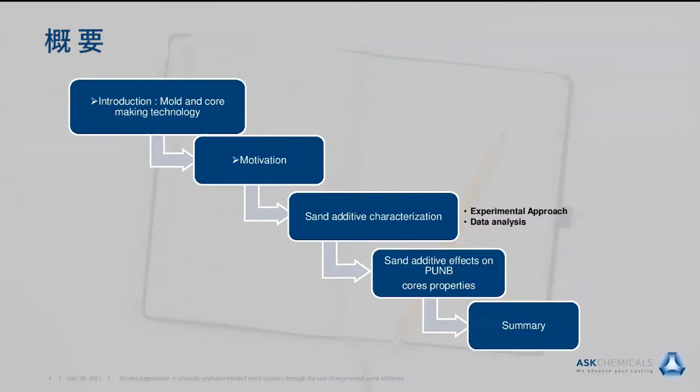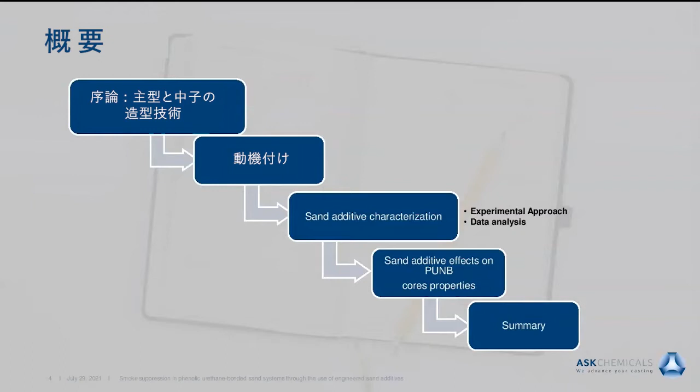So today we're going to start with the outline of the talk. I divided this talk in 5 sessions. First, we'll do an introduction about the mold and core making technology and overall the casting process. After that, I'll discuss the motivation, why we did this project, and then followed by how we did the characterization of the sand additive, the experimental approach, and some data that I will be sharing with you. We will also review the effects this sand additive could have on the phenolic urethane core properties, and we'll finish with the summary.

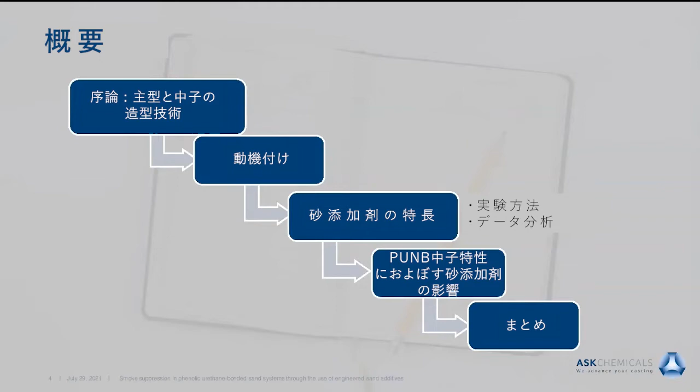So let's start talking about mold and core making. We all know that in order to have good quality castings, we need to make good molds and cores. It's very critical. For that reason, we had to find ways to create these molds and cores that can serve that purpose. And for that, most foundries use silica sand as a media. We're not going to go into all the possibilities, but let's say we want to bind these sand grains together. We have different ways to do it, and I'm going to go over this summary here.

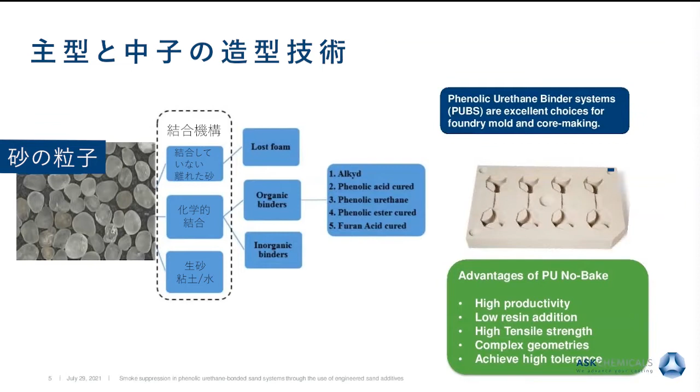So the main categories out there and the mechanisms to bind sand together are the green sand and the chemical bonded sand. We have other systems like lost foam and unbonded loose sand, but the most common are chemical bonded and green sand. Now inside the chemical bonded sand technology, we have another subcategory, which is the organic binder systems and the inorganic. For the purpose of this talk, we're going to mainly focus on the organic binders. And the organic binders also have different subfamilies, as I'm showing here.

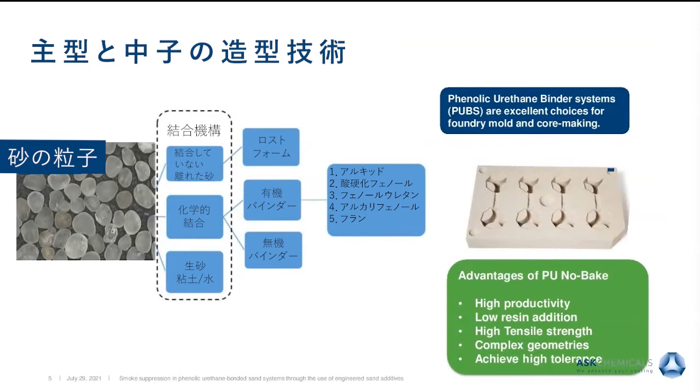What you can see is that most of them actually are differentiated by the way you cure your resin system, right? But for the purpose of today, we are going to focus on the phenolic urethane no-bake technology. In general, phenolic urethane binder systems are an excellent choice for foundry mold and core making, as you're probably familiar with them. I'm going to mention some of the advantages of the phenolic urethane. We have the high productivity you can accomplish. The resin can be used in low level addition, and at the same time, you can accomplish very high tensile strength.

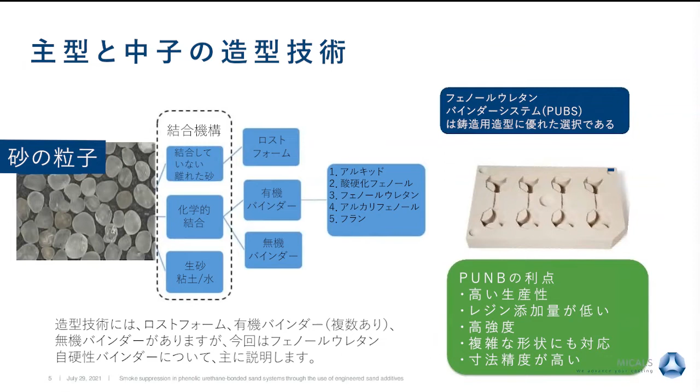They're also very good for making complex geometries. So when we have those complex shapes that need to be designed, this binder system serves this purpose really well. Also for surface finish of the mold, I think they're wonderful for that kind of property. And we can achieve high tolerance using these binder systems. Now, when we take those molds and cores made with phenolic urethane to the casting process, when we're ready to pour the molten metal,

the phenolic urethane will be exposed to very high temperatures due to contact with the molten metal. And when they are exposed to very high temperatures, they undergo thermal decomposition, so they get pyrolyzed, and as a result of that, there's undesired smoke and emissions. There's been a lot of work, especially at ASK, on the formulations of PEP SET systems, which is how we refer to our phenolic urethane no-bake systems, on improving this situation with the smoke and emissions. Reformulating has been a big thing, and I think we have gotten significant progress in some of our binder systems to eliminate some of the smoke and undesired emissions.

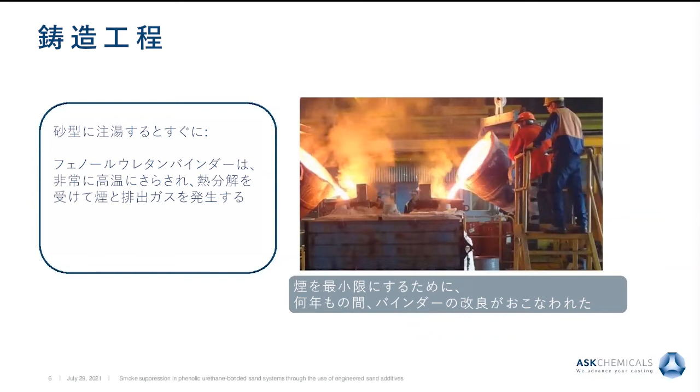But still, we have some more work to do, and we keep improving. We want to go toward cleaner technologies every day. That's kind of ASK's mission. And that will take us to the motivation of this talk today. The idea is to use an engineered sand additive. Sand additives are used in most foundries for controlling casting defects.

So this time, the idea is to have this sand additive serving a dual purpose. So in addition to the high quality casting and eliminating casting defects, we will be able to reduce the smoke. And for the rest of the talk, you probably hear me saying the word DESA. This means dual engineered sand additive.

I will refer to this proprietary blend that we'll discuss here as maybe VLSMK later on. So that's just the way we refer to it sometimes internally and sometimes in the lab. This engineered blend is now patent pending. So let's walk through for the rest of the talk how we developed this sand additive.

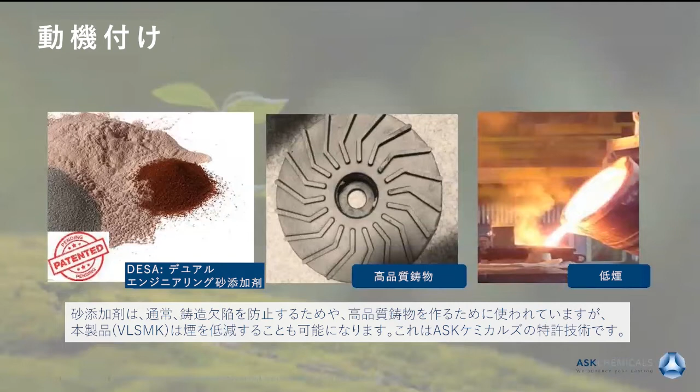So first we had to do some bench work. So in our R&D, we just developed small cores, and it's a simple concept, just like making a mold or a core in an actual foundry. We take the silica sand, we mix it with the sand additive. I always actually suggest this to people: you have to be sure the sand additive is completely mixed with the silica sand before you add your

phenolic urethane binder system. The phenolic urethane no-bake binder system has three parts. There is a phenolic resin, then the polyisocyanate, and then we have the amine catalyst. In this case, it's a liquid amine catalyst, which will be used to control the speed of the reaction. The result of that is a urethane bond. That's when you cross-link the polymer. So you form a very nice mold or core.

Just to show below some examples of the small specimens we use in the lab, so people are familiar with the dog bones. We can make dog bones at different conditions. Always, of course, we use a control specimen, which is the one with no additive, and then we can change the level of the additive to 2, 4, 6%. And later on, I will show why we use a certain particular range for this sand additive.

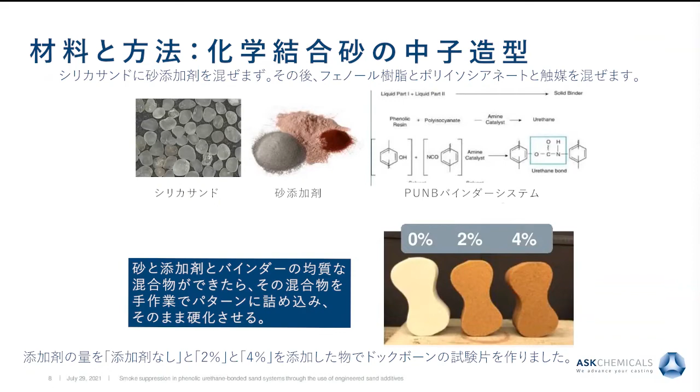So here's the first example, the first observation working with this engineered blend. So if we want to look at how much smoke we are producing, the first experiment you will do in the lab will be to pyrolyze the cores. So we use a muffle furnace. We place the cores at around 700, 750 Celsius for about a minute. Then you take that core and you can place it on a ceramic bench, a platform.

And as you can see on these two photos, these are actually photos from a video that we made. On the left side, you see the no additive. We try to help the eye by putting a black background and a ruler. And you can see that the no additive shows a significant amount of smoke. And on the right side, we have our dual engineered sand additive at 4%. And it's not completely 100% smoke suppression, but definitely there is a significant amount of suppression of the smoke in the presence of this sand additive.

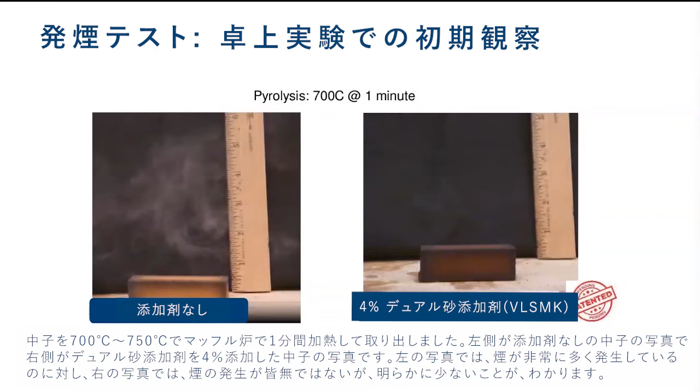Now, of course, we needed to do something a little more fancy than just looking at the black background and a ruler. So we wanted to quantify the smoke. And the way we do it, we use the same approach. We take the pyrolyzed cores, but now we transfer them to a chamber. So I show here in the middle of the pictures the actual experimental setup. This experimental setup is a vertical stack. You have a light source and a photodetector facing each other.

And when the smoke, due to the core present, starts traveling upwards, you will see that the incident light will be scattered by the particles and anything that will be blocking the incident light. For that reason, like a physics concept, you will have scattered light, which is what will indicate the amount of smoke present in the experiment.

So when you record this, you will measure the intensity of the scattered light as a function of time. So this blue curve here is just a cartoon to understand the data. The blue curve means you have a core specimen that had higher smoke, and then the orange curve means less smoke. That's the kind of data that we'll generate from these experiments.

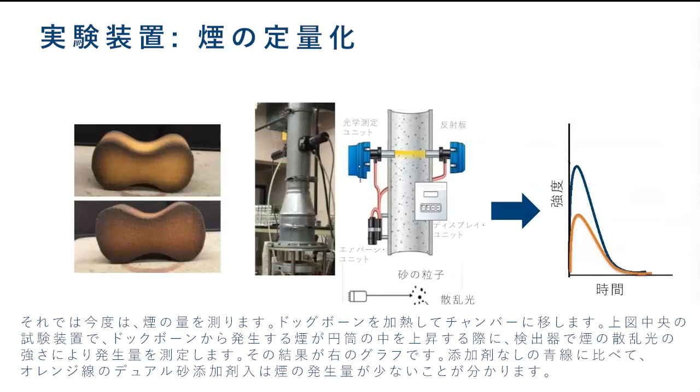So let's look at some real data. We measured 4 samples here. I'm actually showing the picture of each of the pyrolyzed dog bone specimens at different conditions. We have a control sample, which is the no additive. We always have that there for comparison. We have 2 levels for the dual engineered sand additive, VLSMK, 2% and 4%. And we also added a commercial sand additive just to have another comparison point.

So as you can see clearly here, as I explained earlier, if you have a plot of intensity as a function of time, if you take the area under the curve of this, that will be your total smoke. So if you see here, the green and red curves definitely show some reduction. So if we want to quantify this a little bit easier, you can sum these individual points and get the area under the curve, the total amount, and divide by the intensity as a function of time sum in the presence of no additives.

When you do the normalization, you can see at 0% you had 100% total smoke. As you increase the amount of sand additive, you will see there is a decrease in that total smoke. So to determine the smoke suppression, you do 100% minus this number. That will give you your smoke suppression.

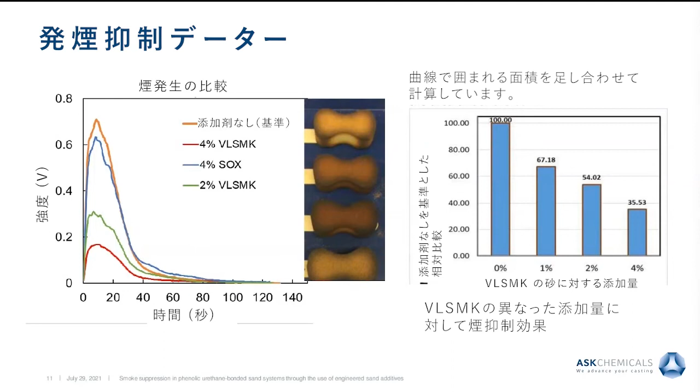Now we were very excited here. I mean, this is exactly what we wanted to accomplish. We wanted to have an additive that was going to help to control some of these smoke and emissions. And this bench work was for us very exciting. So we wanted to do the real thing, right? So far I showed you that we've done everything with little core specimens, pyrolyzed them, and looked at the smoke.

So at ASK, in our R&D team, we have the advantage that we had a pilot foundry lab. So we had a 300-pound induction furnace where we can pour steel, iron, aluminum. So we decided to make some bigger cores on step cones and then pour some steel and look at what we were going to find for the smoke reduction. So you can see there the step cones made; the darker ones are made with the additive. The light color is the one with no additive.

And we placed them inside graphite molds. The idea with the graphite mold is that we only see the contribution coming from the core in case we want to determine the smoke and emissions. So we want everything from the core, not the mold. At the moment we were going to make these videos for recording this event, we removed those pouring cups. They get removed immediately since they're made also of PEP SET. So we removed them. Let me show you now a video that we made.

And by the way, just to make clear here, these cores were made with round silica sand, 1.2% PEP SET Magna 1215, 2215, and a ratio of 60-40 part 1 to part 2. And the catalyst was 4% 3401.

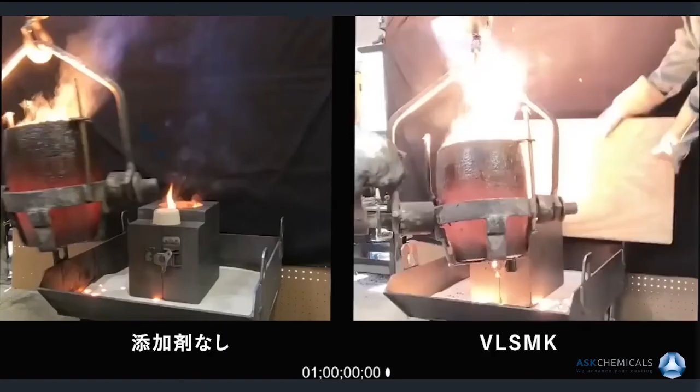Let's see if I can play this video. I think, see if this works.

So you can see here, I'm not playing the whole video because they're very long, because we're trying to set this up. On the left side, you see the no additive. And on the right side, you see the VLSMK engineered sand additive. So I can play it again. In case it went too fast, you can see on the left side there's a significant amount of smoke when you don't have the additive. And once you put the additive in the core, you definitely suppress significantly the amount of smoke.

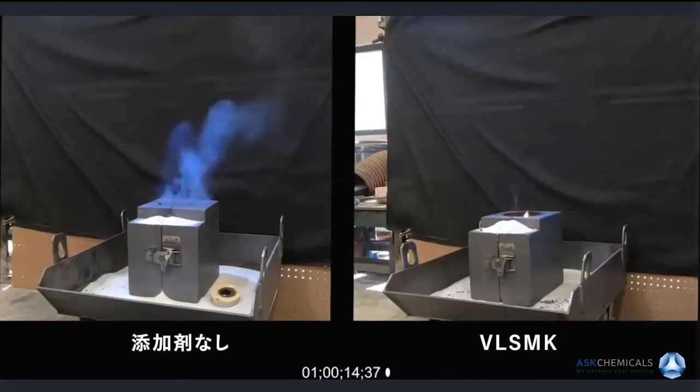So let's go back to the presentation. Right. All right.

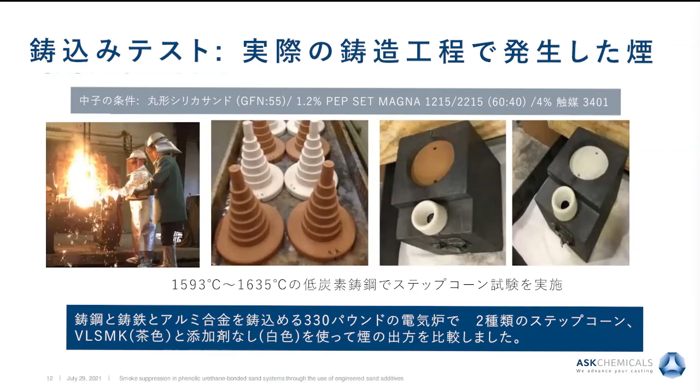Okay, so what you can see, and you just saw in the video, is that clearly there's no question: with the additive, we can definitely suppress quite a bit of smoke there. When we analyzed each of these videos, it took about 8 minutes for the core with no additive to stop smoking, and it took about 3 to 4 minutes for the core to stop smoking in the presence of the additive. So that already gives you an idea that what we saw in the lab was in good correlation with what we actually see in the foundry.

Now, so far, we had seen the smoke suppression. It works very nicely. Now, the next question that comes to mind is, what are we suppressing? Are we suppressing any of these undesired emissions that we know are there during the casting process, like volatiles or any pollutants? Well, we needed to look at that.

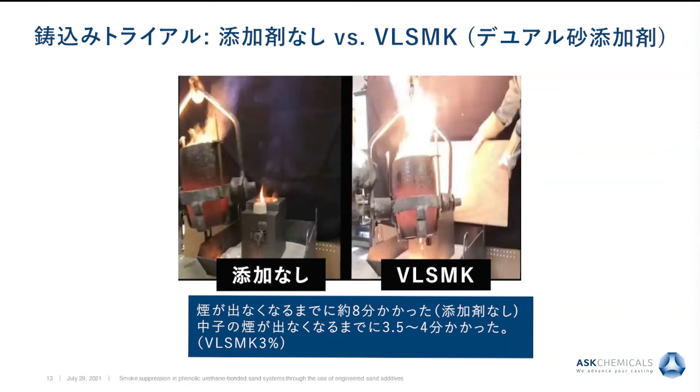So for that, we went back to the lab and took again some of the cores. This time we made, I think, 6 samples, 6 core specimens at different conditions. Some with different sand additives, but all of them were made with the same amount of sand additive, 3%, I believe, in this case.

The core conditions were also the same as I have been showing so far during this presentation: 1.2% PEP SET Magna, 60/40, 4% catalyst. And this work actually was in collaboration with our colleagues from ASK Germany. They do have a custom-built mini hood stack setup. And this experimental setup is very interesting.

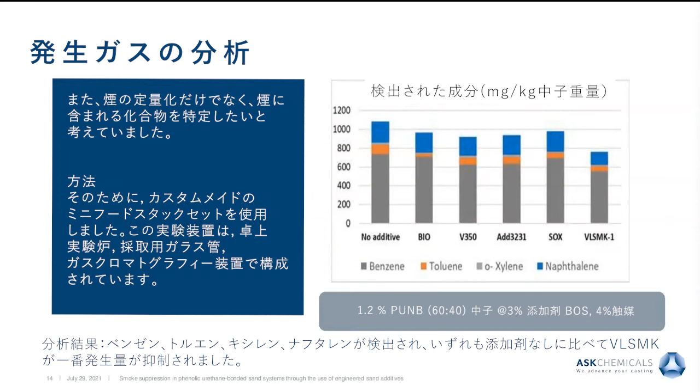So at this point, we had shown we can suppress the smoke, we can suppress and reduce some of these undesired BTX and naphthalene type of emissions. So we have to answer a different question now. We are developing a sand additive, and when you're developing a sand additive, especially for us in ASK, we look in detail at a lot of aspects of this, because when you put a powder that is finer than sand, you need to be careful not to interfere with properties like tensile strength, the speed of the reaction, and the most important thing also, it needs to serve the purpose of eliminating veining and metal penetration, and in some instances it should help with the surface finish.

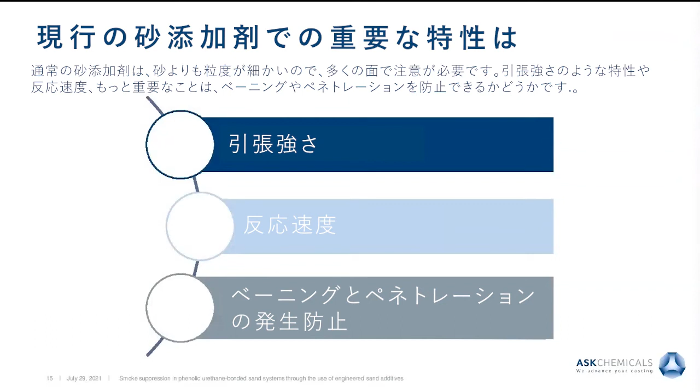So independent of the smoke and emissions, these additives that we develop needed to help with this, so we needed to validate this. So let's look at each of them. The tensile strength: it is well known that for most sand additives, because they are finer powders with high surface area, they could have a reduction in tensile strength. And so that's why when you develop a sand additive, you have to do quite a bit of homework trying to adjust the distribution so it's less detrimental to the tensile strength.

So let me show you here two different time points for tensile strength. We picked 1 hour and 24 hours. Of course, we can monitor other time points, but just to illustrate here, you can see no additive, and these cores are made with, again, 1.2% Magna, 60/40. We have 0% for no additive and 3% sand additive for the rest of the samples. And you can see that we're not surprised about this. There is a reduction in tensile strength from the use of the sand additive at 3%.

But the way we recover our tensile strength is by adjusting the catalyst to a different catalyst with maybe higher active ingredients. So we have now 3501 here, and then we are already kind of back to where we want to be. Remember, the error in these tensile experiments is probably 20%. So we were very pleased to be able to recover the tensile strength of the core without having to increase the binder level.

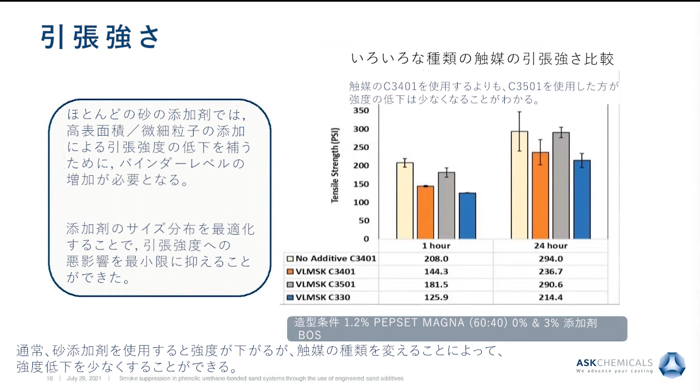Now let's look at the speed of the reaction. So in a PEP SET system or phenolic urethane no-bake, these are two aspects that I think are very important. So when you mix your sand with your binder, you're gonna have a certain time where you can mix, you can work with the aggregate, but it's gonna start curing, it's gonna start hardening. So we have two points in time, which is what people define as the work time, and that will be the amount of time available to work with the sand aggregate before it starts hardening.

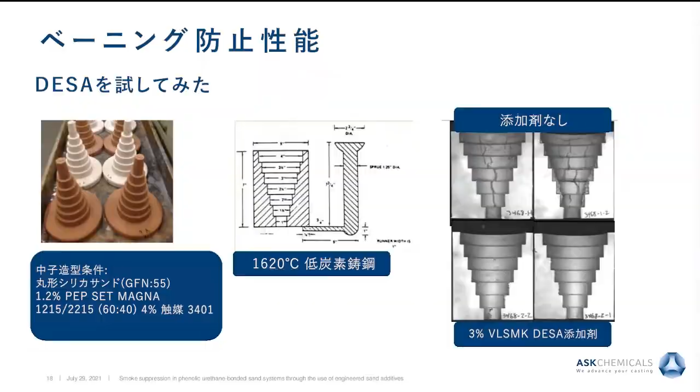So in summary, I will say we have successfully developed a dual engineered sand additive that can produce high quality castings. It can reduce the smoke. And on the other hand, the other properties of the phenolic urethane no-bake mold and core technology can be adjusted to make this whole process work smoothly and without any issues.

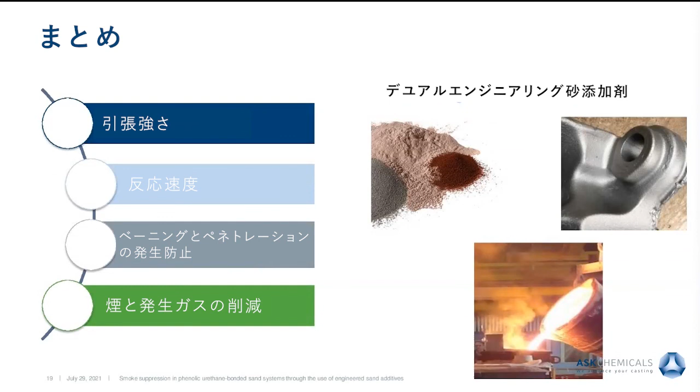So far, the tensiles can be adjusted, the reaction speed could be adjusted, the elimination of the veining and metal penetration and improved surface finish was accomplished. And more exciting, we had the smoke and emission reduction, which will be the new benefit from the use of this sand additive.

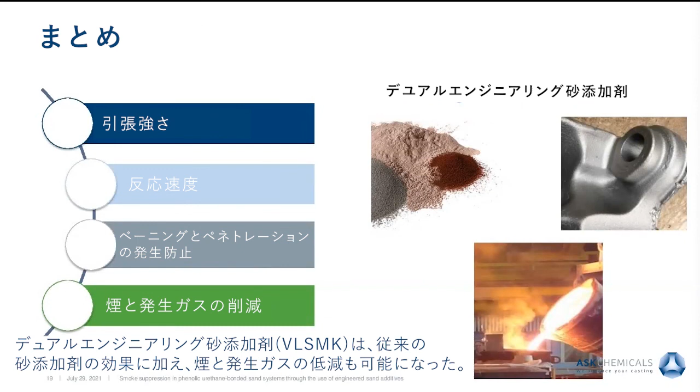Of course, I can finish this talk by acknowledging and giving thanks to the people who worked with me really hard on bringing this project to a successful end. We have in my R&D team a lot of good scientists, and especially I want to thank Matthew Shoffner. He did lots of smoke testing and tensile strength. He worked really close with me on this. I want to thank Marek Simon, who is our technical product manager for metallurgy. He really helped me, along with Glenn, for setting up the foundry testing and smoke suppression in the MAL lab, the metal application lab.

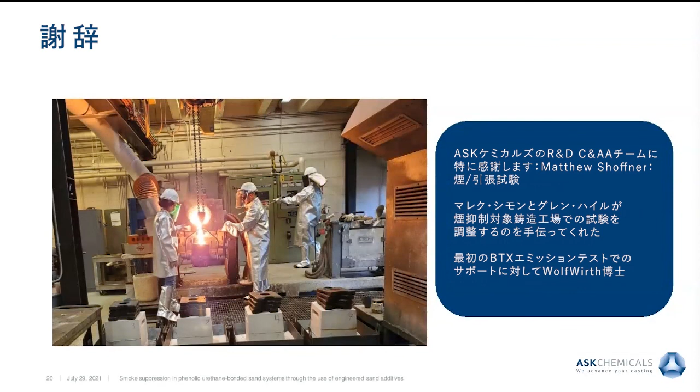And also last, Dr. Wolf Wirth for his support on the BTX emission testing in Germany so that we could characterize that part in the project and get some idea what we're measuring in terms of emissions. And with that, I think we can discuss some questions.